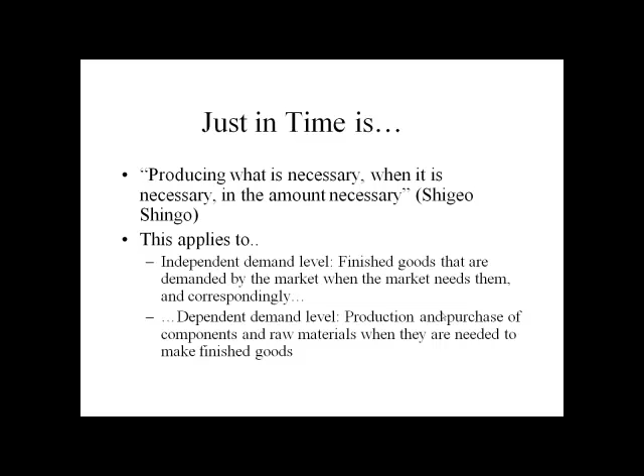So that sort of implies that we also, at the dependent demand level, produce and purchase components and raw materials, the things that are required for our finished goods, when they are needed in order to make finished goods. Not too far ahead of time, not in excessive amounts, and certainly not the wrong things.

So let's start out talking about the independent demand level. And when we're talking about that, the main technique that we need to understand is uniform plant loading, also known as mixed model production. Generally, if we think about product or family of products, the market demands a mix of those products. So the idea is that we try to make products in a mix.

In other words, we make products in very small batches rather than in large batches, and that allows us to produce each different item in a product family frequently, as opposed to producing items in large batches infrequently.

So here's an example. On the top half of the screen, we've got what the market requires. And you can see that, on average, this could be a production forecast, for example. The market requires 10 units of A, 20 units of B, 5 units of C, 5 units of D, and 10 units of E every week.

So traditional operations management would probably tell us that on Monday, for example, we go ahead and we produce all the A's in one big batch. So we have 10 units of A's that we're going to produce on Monday, and we need 20 B's. So if we can produce 10 units a day, we would produce a big batch of B's, and that would consume 2 more days. And then you can see correspondingly what happens to the rest of the week. We produce one batch of each item.

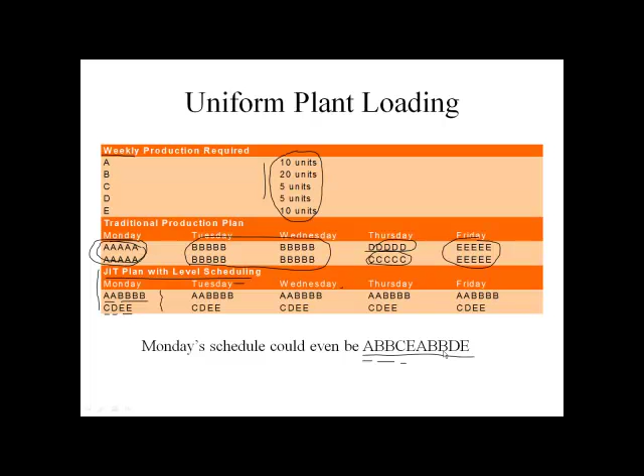We see this in the U.S. Stroller reading, in particular if we compare Exhibit 7 to Exhibit 8. Exhibit 7 is the kind of old way of doing things, the pre-JIT way of doing things, and Exhibit 8 is the master schedule that they envision with JIT. In Exhibit 7, of course, they're producing in large batches. In Exhibit 8, there's smaller batches, and each model is produced more frequently, just like we saw on the previous slide.

We should point out that we don't really have true mixed model production in the U.S. Stroller example because U.S. Stroller is essentially retrofitting an existing system to try to become more like a mixed model system, but they can't get to the true sort of mixed model ideal because of some of the capital assets and equipment and things that they have. But they're getting closer, and as a result of that, they're going to have less finished goods inventory and accrue some other benefits as well.

Okay, let's shift gears to the dependent demand inventory level. Remember that JIT's goal is to produce what is necessary, when it's necessary, and in the amount that it's necessary. And if we're talking about dependent demand level items, then that includes work centers within our operation that are producing materials for our consumption to go into other things, and also materials that we might buy from suppliers.

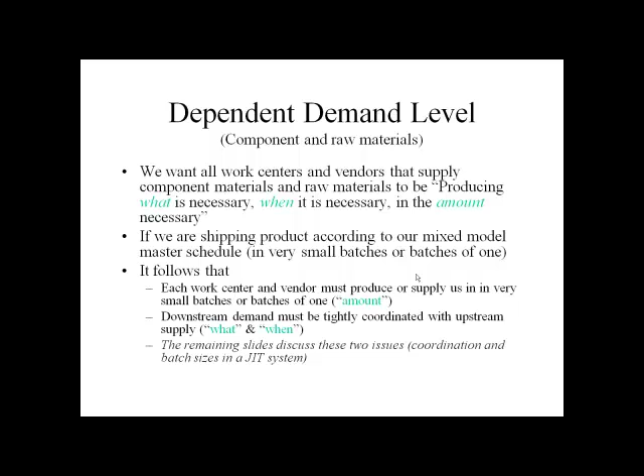And it also follows that downstream demand has to be tightly coordinated with upstream supply. So we need very tight coordination, very tight communication, very precise scheduling between consuming operations and producing operations. So let's start out with the first of those 2 bullet points at the bottom of the previous slide, and that would be producing in very small batches.

Typically, in conventional operations, we tend to produce in fairly large batches at the dependent demand level, just like at the independent demand level, which was what we talked about before. One reason for that is setups. Traditional operations management views big batches as important to essentially prorate the costs of a setup across a lot of units.

JIT kind of turns that on its head by questioning the assumption that setups have to be long and expensive. In other words, JIT eliminates setups or reduces setup times, which essentially makes producing in smaller batches more economical. So let's talk about that a little bit more, and then we'll come back to the second bullet point on this slide.

In the U.S. Stroller example, they use the economic order quantity model. You may recall that the economic order quantity model looks at setup costs and holding costs, and the greater the setup costs, the more units one has to produce in a batch to reach a so-called economic order quantity or economic batch size.

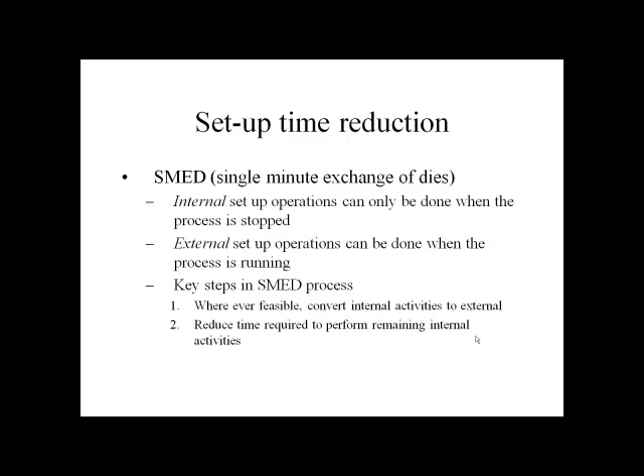So the key steps in single minute exchange of dies are, number one, wherever feasible, we want to convert activities that we may be doing internally to externally. So any activity that we can possibly do while the process is operating, we want to do when the process is operating. And then the second step, after we've done step one, is look at all those remaining internal activities and reduce the time required to perform those remaining internal activities, so the process is stopped for an absolute minimum of time.

There are a lot of applications of SMED beyond automotive and even beyond manufacturing. One example is the airline industry. Airplanes, of course, are very big, very expensive pieces of capital equipment, and when the airplanes are flying, they're making money. When they're sitting at the gate, transitioning from one flight to another, they're not making money. So anything that airlines can do to reduce that time, that non-value-added time that the airplane is at the gate, the better. So some airlines have gotten very good, particularly Southwest, at reducing that changeover time.

If we wanted to apply SMED, think about the process. We want to think about activities that are internal and external, and think about externalizing every activity that we possibly can. For example, airplanes have food and beverage carts. Some airlines restock the food and beverage cart between each flight. They inventory it, and they bring required drinks and things like that to fill out the cart between flights. But if you think about it, that's stuff that we could really be doing externally. We could really do it when the airplane is in the air.

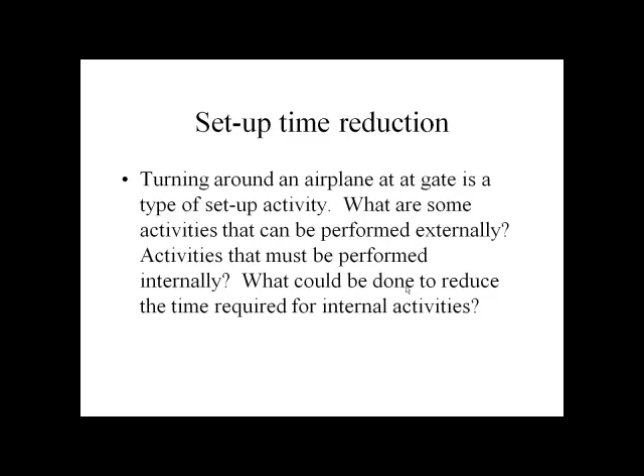Okay, so we've talked a little bit about how JIT reduces or eliminates the number of setups through things like dedicated equipment and cells, and we've talked a little bit about how JIT reduces setup times using techniques like the single-minute exchange of dies technique. So those are two ways in which JIT would view small batch production as more economical than it might otherwise be viewed.

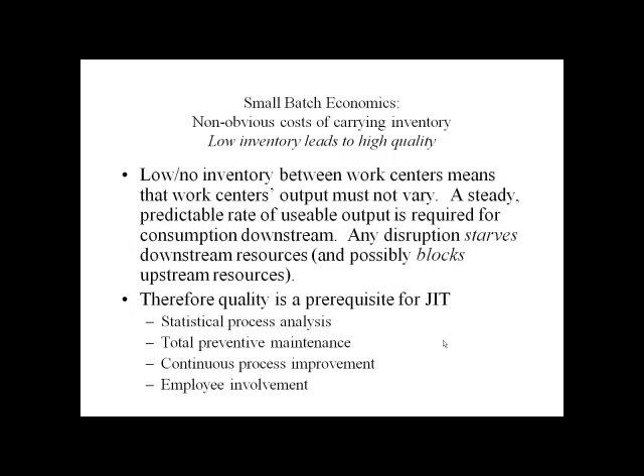In a low inventory system, the effects of a problem, such as a quality problem, an equipment breakdown, something like that, are felt very, very quickly. By contrast, in a high inventory system, inventory tends to cover up or buffer against those types of problems. In a low inventory system, we're forced to deal with quality problems, and that tends to improve the quality of the system. Let's look at an example.

So here is sort of a graphical representation of what we might find at US Stroller. I guess we might find that if the tubes that they dealt with were green and huge. So we've got our tube cutting department here, and after tubes are cut, they go to our tube bending department, and you can see this is a high inventory system. We've got lots and lots of tubes waiting to be cut over here, and then between the tube cutting department and the tube bending department, we've got lots and lots of cut tubes waiting to be bent by this guy over here.

So you might ask yourself, what happens if there's a problem with one of the tubes? Maybe it's defective, maybe it wasn't cut correctly, or maybe it was defective before this tube cutting work center ever got it, but they didn't catch the defect, and the defective material got passed on. And let's just say that this unit here, this red unit, is defective. Well, if we've got all this work in process inventory, and this person here discovers a defective tube, they're not really forced to deal with it.

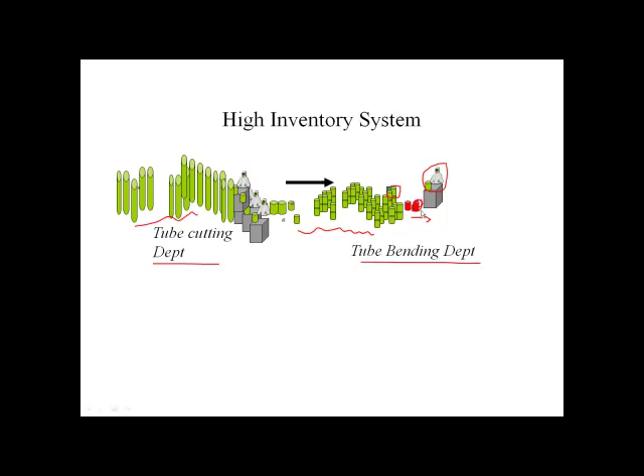It's possible that they might deal with it, they might raise a red flag, so to speak, or they might just sort of put it to the side and maybe grab a different tube to work on, maybe this tube. That's a bit of an oversimplification, but that's basically the case. I mean, it's basically human nature, especially if I've got quotas and things like that, and I'm under a lot of pressure to produce. It's fairly easy for me to ignore, or at least put off dealing with defects that I might encounter from upstream work centers.

Let's look at a contrasting situation. Let's look at a low inventory system, and you can see in this system there's almost no work in process inventory. There's almost no cut tubes. This is almost a one-piece flow. Let's say now that this person finishes working on this good unit. They go for the next unit. There's only one unit here, so they don't have any choice, and it's a defective unit. Now what are they going to do? Well, it's a lot harder for them to ignore it because there's no other pieces in the pile. There's no pile of WIP for them to go to.

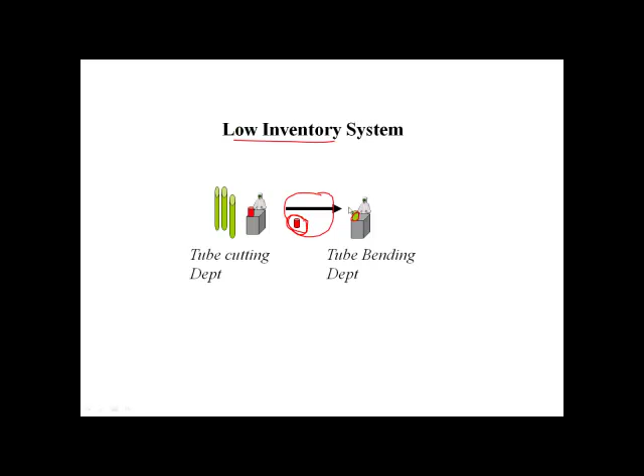So it's going to be more likely that this defect is going to be felt, that this defect is going to have to be dealt with. This person's going to have to raise a red flag, and hopefully that's going to cause us to go back and figure out what's creating the problems over here, deal with those problems, fix those problems, and improve the system.

Similarly, if this machine breaks down, it's not going to take very long for the work in process inventory here to be depleted down to nothing. Now all of a sudden this person has nothing to work on. Again, that situation raises a red flag pretty quickly, becomes pretty obvious, and we're probably going to have to figure out what's causing the machine breakdowns and deal with that situation, hopefully fix that situation, and improve the reliability of the entire system. In other words, reduce the variability of the entire system.

There's a fairly famous metaphor, the boat on the Rocky River, that also explains this point. It explains how quality is required for JIT to function, but also at the same time how JIT drives up quality.

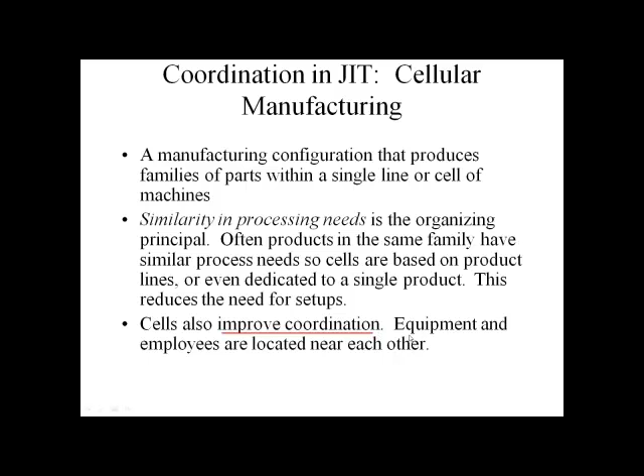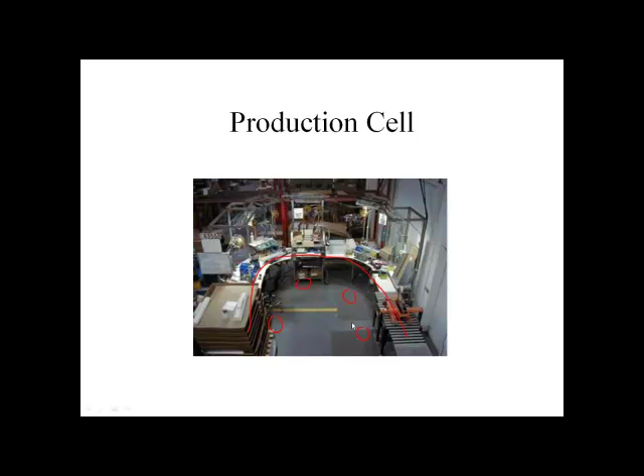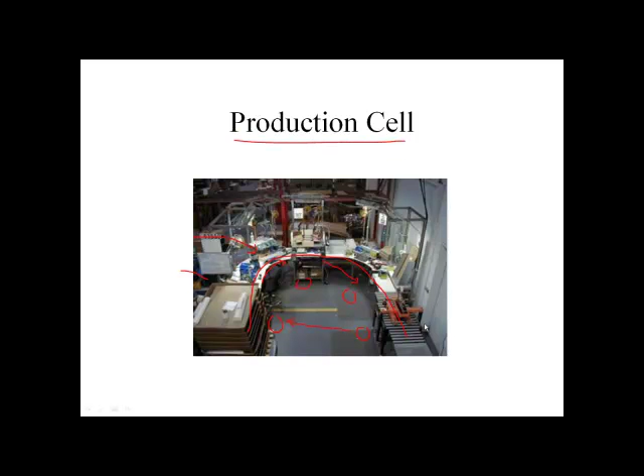It also means that if one person gets behind, maybe another person can hop over and help that person out to keep everything in balance. Because it is essentially a little miniature production line, we can essentially have one piece flow between units in the cell, and there's no need to take material outside the cell, put them in inventory, and then bring it back later to be processed by another worker. So cellular manufacturing, just really as a function of the layout, inherently gives us a real high level of coordination in our operation.

An alternative to coordination using cells is coordination using Kanban. Kanbans are especially appropriate when work centers aren't adjacent to one another as they are in cells. In other words, we might have a situation where we can't group work centers or workers so that the downstream process is immediately adjacent to or next to the upstream process. If we're in certain situations, there might be quite a bit of distance. There might be multiple floors or a whole lot of linear space between operations.

If that's the case, then a Kanban can be a very effective technique. In fact, you can even use Kanban to coordinate with suppliers who might be a couple of towns over or even in the next state. Kanban literally means sign, and a Kanban is a sign or an authorization that's sent by a consuming entity or consuming work center to a supplier, an internal supplier or an external supplier. And you can think of that sign as a sign to produce or an authorization to produce a certain number of a certain thing. So let's explain how that might work.

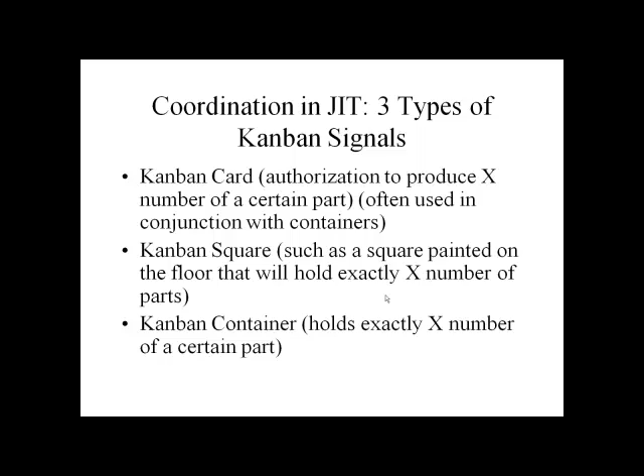There's several different types of Kanban signals that we can send. Three very common ones are a Kanban card, a Kanban square, and a Kanban container. So let's talk about at least two of those. So let's say we're making bikes. Bikes are kind of a good thing to talk about because most of us have a good sense of the different parts that go in bikes, at least the main parts that go in a bike. So how might a Kanban container system work to coordinate bike production?

Well, let's say the last step in making our bikes is final assembly. And let's say that we keep 5 racks of 10 front wheels each in final assembly. And let's say those racks are on wheels. Each rack has 10 slots, so it can only hold 10 wheels. Can't hold more, can't hold less. At least it can't be overfilled. Whenever we consume a rack in final assembly, we send that rack back to the work center that assembles the wheels, and that serves as a signal to produce 10 more wheels.

Of course, if we're using 3 or 4 or more different types of wheels, the type of wheel would have to be identified on the rack. So the wheel assembly people would receive that signal, they'd receive that empty cart, and that's essentially their signal to produce 10 more of that type of wheel. When they produce them, they fill up that rack, they transport that rack back to us in final assembly. We can think about what happens kind of one level down.

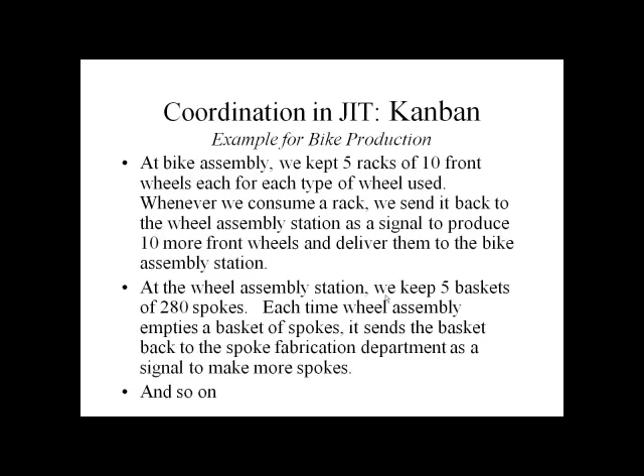The wheel assembly folks that we've been talking about might keep baskets of spokes, right? Maybe each basket holds 280 spokes. So they're emptying out those baskets to create wheels. And when they empty out a basket, the basket would be sent back to a fabrication department that cuts wire into spokes, or maybe even an external supplier that makes the spokes for us. And each one of those baskets serves as a signal to produce 280 spokes. And on it goes, back and back through the system. One department, the consuming department, basically sending these little pull signals to the supplying departments to produce.

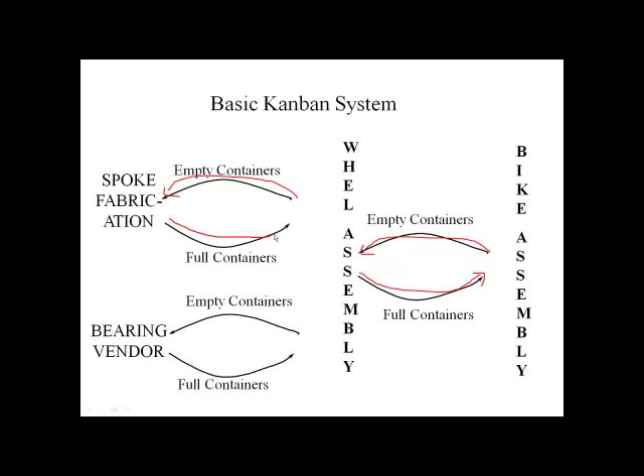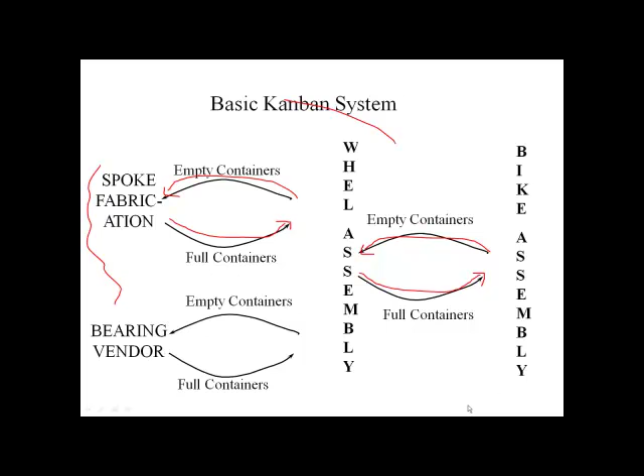There's kind of a graphic representation of the system. We can think of the system as empty containers flowing back, and those containers being filled up, being sent back to the consuming entity, and at the same time, containers going a step further back, and full containers coming back, and so on. Of course, we could draw more and more layers here, and of course, there are more and more layers going out this way, because it takes more than just the wheels to make a bike. So it's a very simple, but incredibly effective way to coordinate operations.

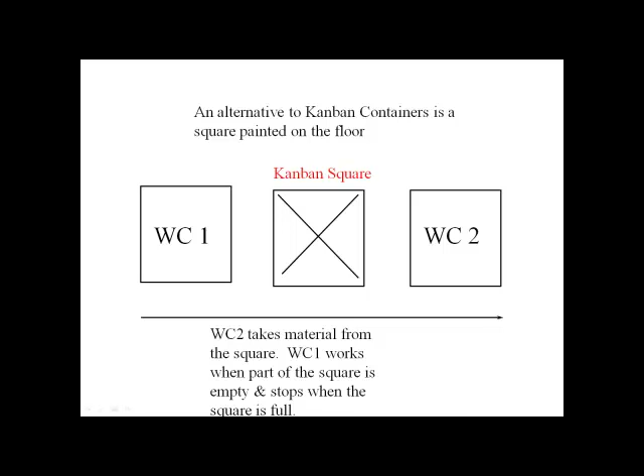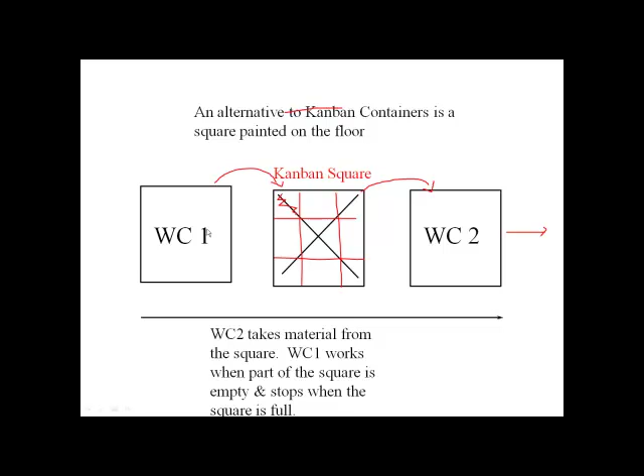An alternative might just be an empty square on the floor. So if we have Work Center 1 feeding Work Center 2, Work Center 1 is producing, putting material in this square. Work Center 2 is producing, taking material out of the square, finishing it off, and maybe sending it out to the market. So anytime there's an empty place on this square, it serves as a signal for Work Center 1 to produce more. This square might be set up so that it holds exactly maybe 9 pieces of work in process material. So anytime there's an empty square, it's a signal for these guys to produce.

A really nice thing about a Kanban system is that it limits the amount of work in process inventory in the system. Earlier in this virtual lecture, we talked a lot about the advantages of a low inventory system, and it just so happens that Kanban enables us to have that kind of system. It was one of the factors that enables us to have that kind of system.

How does that work? Well, if you think about the examples that we've been talking about, where does the permission to produce come from? Well, the feeding work center doesn't produce until it has an empty Kanban. If all the Kanbans that it's supposed to fill up are full, then it doesn't produce any more. So that naturally limits the amount of work in process that we can have in our system. So Kanbans are sometimes referred to as queue limiting devices.

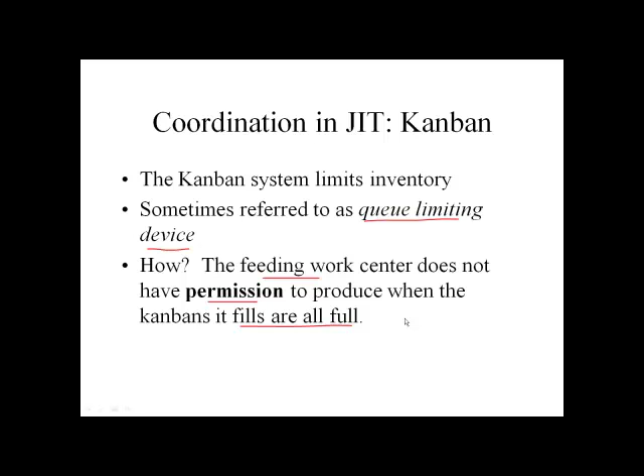So Kanban is kind of a dynamic, self-regulating way to make sure that the system doesn't produce too much in-process inventory. Again, if all the Kanbans that I'm responsible for filling up are full, if all the spaces in that Kanban square that we drew are full, I don't produce anymore. I go do something else. Maybe I do some preventative maintenance, I do some cleaning, I engage in some kind of training, but I don't just keep producing inventory for the sake of producing inventory.

Okay, so far we've been primarily talking about internal operations, but many companies have thought about how to implement JIT between companies. In other words, between a consuming company and a supplying company. And many companies have been very successful with it, and they've reaped a lot of the benefits that they might get internally in these intercompany relationships.

If you think about what JIT would mean for dealing with suppliers, it would mean having no raw material inventory or minimal raw material inventory. If I'm not going to have a bunch of purchased material from my suppliers on hand in inventory, then I have to have a steady, predictable supply from my supplier that's high quality. In other words, I have to be able to count on my supplier delivering when they say they're going to deliver, and I need to be able to count on every piece of material that I get from my supplier being the quality that's required.

It also implies receiving material in small quantities or small batches that are more or less paced to match consumption. Perhaps that's with the Kanban system, where I'm actually sending empty containers in a truck back to my supplier and they're filling it up. Perhaps it's some other kind of system. So, many companies, again, Toyota is a great example, have found that there are some things that they can do with regard to supply management to help facilitate this.